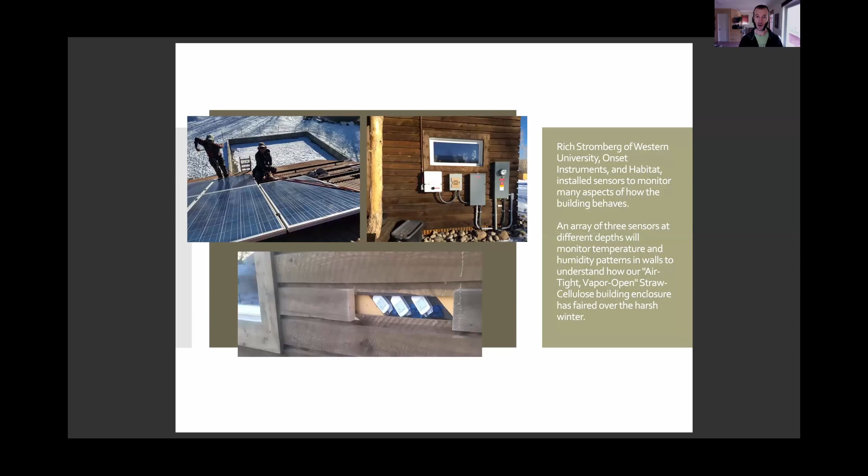And I should mention in the other picture here, you can see the solar, but in one of those boxes is actually an electrical monitoring system. So every circuit in the house has its own individual monitoring from a company called Emporia Energy. So we're not only able to know how much energy the house uses and how much solar is produced, but also how much each appliance uses. And we have water monitoring to monitor the amount of water, the amount of hot water, etc., as well as indoor air quality.

So yeah, this was the second building that we built for Habitat and with Habitat, building on the success of the first, as you can see on the left. And this was a 3-bedroom, 2-bath. As you can see, it got a different award from Green Build magazine. This was during COVID that we built this, so we had a lot of challenges to figure out on this one. The painted siding is actually cement siding that was donated. Typically, we would use local wood materials or a lower embodied energy material, not cementitious material. But because it was donated, it was free, and so we took advantage of that.

But a very similar envelope system, which we'll see the inside of soon. Both are single story, both have a vented attic in the top, with the heating and ventilation supplied by a combined system in the attic. That's the front of that house. All the houses have a south-facing main roof. And so again, we were able to at least cover the energy needed to run the all-electric home with a 4 or 5 kilowatt system. I'd argue you could make them bigger if you wanted to use more EV or you had some other energy needs. But we worked with Rich and with Nunatech and with students to design and install them in a way that was appropriate to the demand needs.

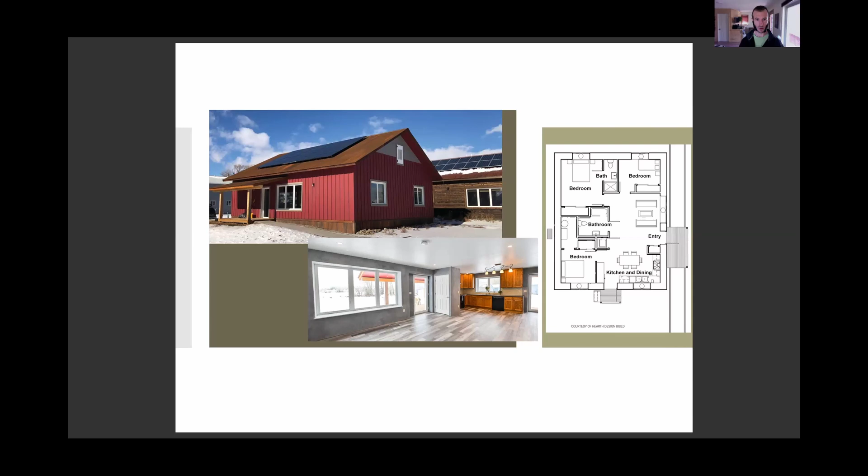Again, this is an interior shot of the 3-bedroom house, and you can see the plan on the side. The only real difference between this and the 2-bedroom is there is a bedroom in the top right and a bathroom for the master. Again, all that gray wall surface area in the interior is all plastered. We actually made our own plaster boards for this project versus the lath and clay plaster we used in the first project.

Just a note on heat pump dryers, we've had mixed success with them. It's a very airtight house, so it's nice having a condensing dryer that doesn't create negative pressure by exhausting to the exterior. But we've found that they're a bit of a challenge to maintain, and at our high altitude, some of the electronics have issues over time. Lessons learned. Again, this is another shot of that kitchen, in that gray plaster.

And we didn't only just try to make an efficient home, as I described. We also tried to be very cognizant of our embodied energy and our transport. We had one student in particular who did his thesis on the habitat houses and did a lot of carbon accounting. The thing about carbon accounting is, at the time, this was like 4 years ago, it wasn't quite as developed as it is now, and the tools still had some gaps that are being filled in at the moment. But this is part of why we got our low carbon footprint award from Habitat, because of our attention to doing these studies to make sure that we were actually accounting for materials we put in.

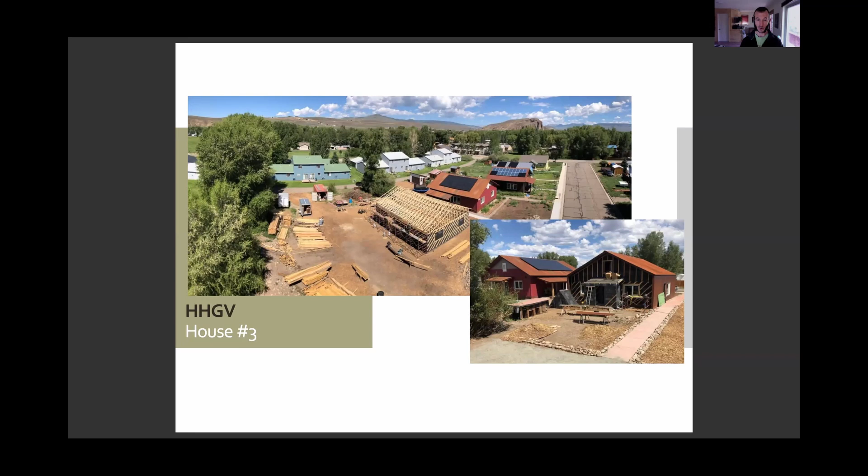You can also see that the solar is a little bit patchy, as Rich Stromberg has created an organization called Equitable Solar Solutions, and they not only donated the material, but a lot of their time, students' time. So we don't always get the matching or the prettiest solar panels, but they have a program where they recycle solar panels for community use, like this situation.

This was the 3rd home, just some of the aesthetic details, and also trying to work with durable materials. The rusted steel, for those of you who aren't familiar, in mountain towns is a very fashionable finish at the moment. But actually it's very practical. And while the steel itself isn't made in our local community, the rolling of it into corrugation is. And by just using raw steel and adding a vinegar solution, we're able to patina it and not have any toxic paints, because often paints associated with painting metal have a really high impact, both in terms of energy, but also from a toxicology perspective.

So going with that aesthetic choice, while steel does have a high embodied energy, as a long-term durable material that doesn't require maintenance, there's a reasonable trade-off there. So we use it for siding in this situation as well. This was the interior of that 3rd home. We focused a little bit more on wood finishes again. We did a lot more trim work on this house.

The floor, unfortunately, is not wood. It's a PVC vinyl plank, which was affordable, if not the ideal impact. Something we actually experimented with on this project was using OSB as a finish. So we sanded the OSB subfloor and did a really nice finish on it. And I really liked it, but it wasn't to other people's appeal.

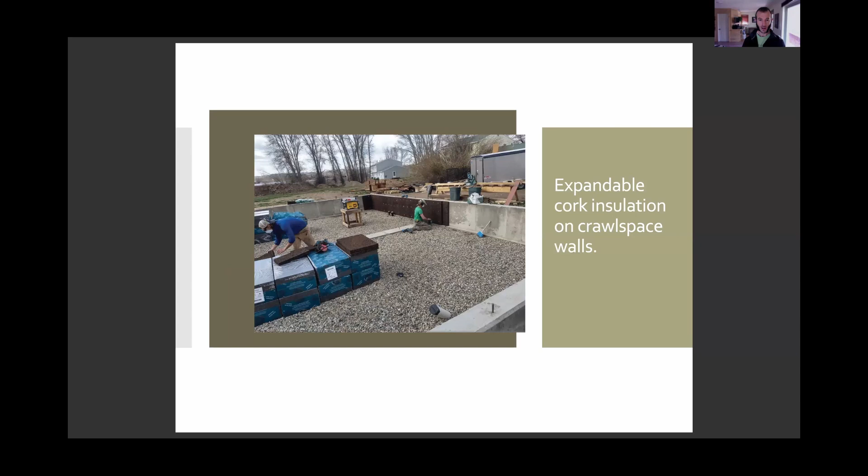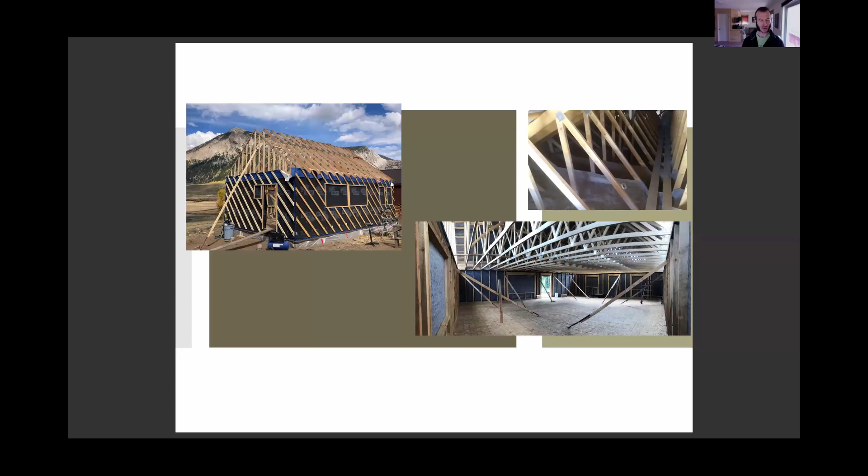This was a similar project that actually wasn't Habitat, but a local builder who volunteered with us took the techniques to build his own home. This is a shot of the outside of the house showing the sheathingless system. So essentially a stick frame is stood up like a standard wall, and then you wrap it in WRB, an air and moisture barrier, and then you apply diagonal bracing over the top of it, which gives the shear, but also creates this vented cavity for the sheathing to go over, or the siding to go over. Going at 45 degrees gives you the option of going vertical or horizontal with the siding.

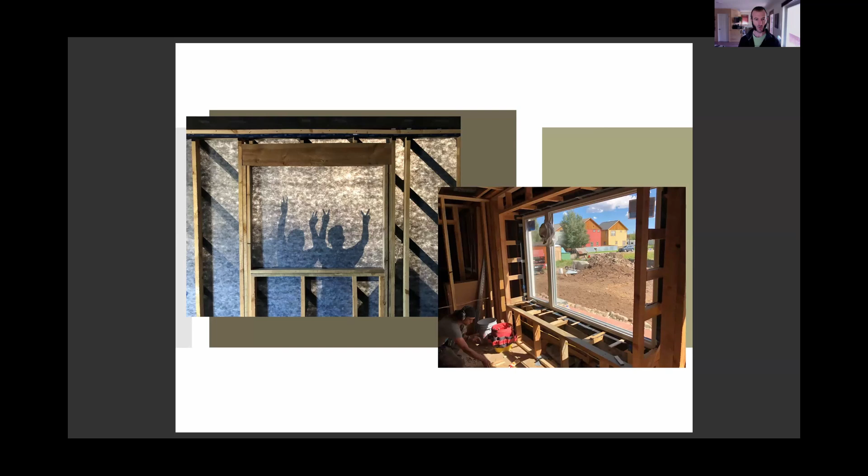The roof was a skip sheathing system, like an old traditional roof. This gives you a little shot of that double stud wall system. We either installed all cellulose or did a straw cellulose mix. Again, very vapor open, but airtight. All these houses, when we did blower door tests, and this was using students and volunteers, very few experienced high performance professionals, all these homes got a blower door test of 0.4 ACH50 or less.

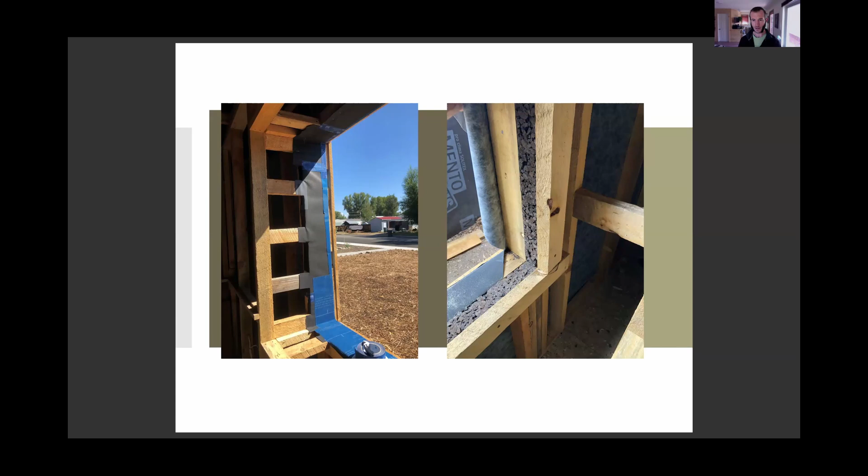Just some of the details of how we dressed the windows and the doors. You can see cork used there for some thermal breaks around the headers and jambs. This is a shot of the inside of the straw bale cellulose wall system. Because there were so many windows and doors and there was so much framing, we ended up actually just framing the exterior wall and not having free form plaster on straw bales, but going over it with lath plaster.

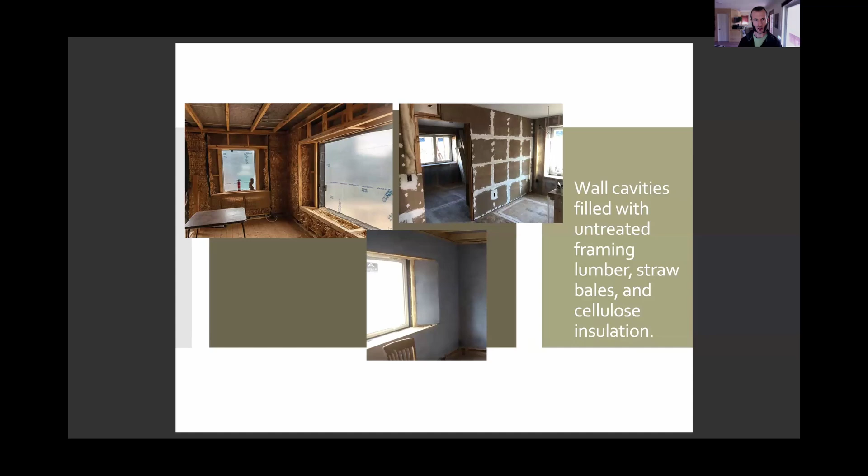And on the top right is an example of our clay wall system that we developed, which was basically making our own drywall panels, but using clay plaster and jute burlap. And so we made these 2x4 foot panels. On the flat, we would dry them out in drying racks, and then we would install them using drywall screws. You can see we've mudded and taped all the seams with the gypsum quick mix. Again, an exterior 20-inch thick wall.

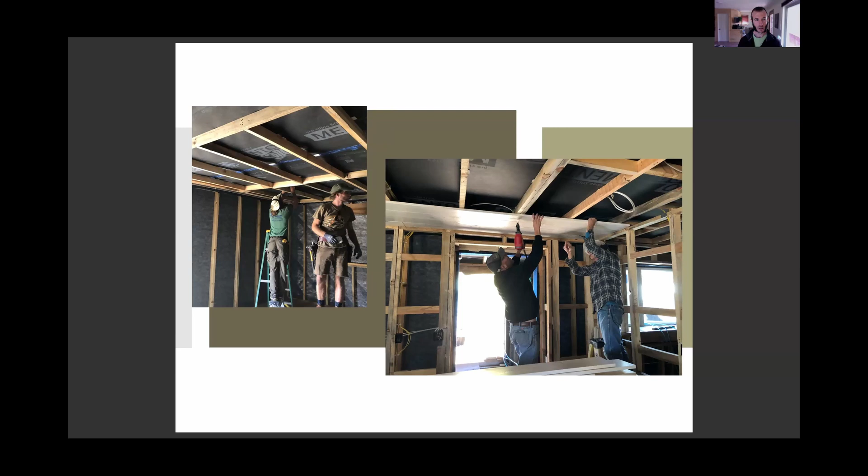We use a drop ceiling below our trusses to make sure that electricians make very few penetrations through our barrier. You can see then just the finished ceiling being installed. Because of the size of our ducting for our HVAC, we ran our ducting above in the attic. And there's an example of that. So we have mostly 8-inch trunk duct, trunk and branch, 6-inch branches. So we supplied the fresh air to the bedrooms and living areas, and extracted our exhaust through our balanced ventilation system from the kitchen and laundry room areas.

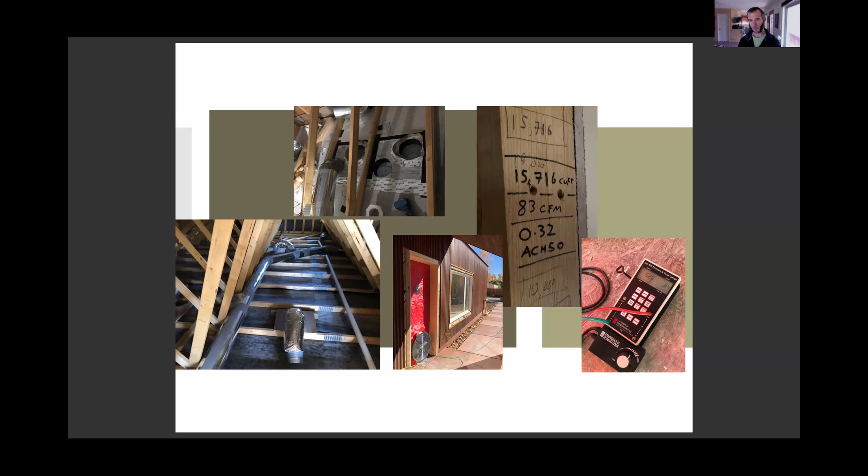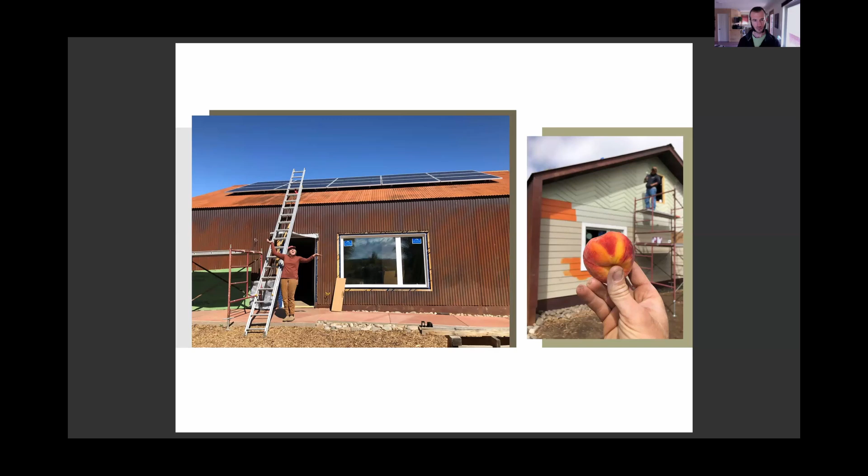And this was our first blower door test, 0.32 ACH50. I think that was one of the lower ones we got. Again, a very small building, but very low CFM. And this is one of the students. This was the peach color one of our clients chose, just proving it's actually peach. And this was the most recent. I actually wasn't involved with the design and the management of this build, but they adapted the design and the envelope system we'd used to build two houses at once, and went back to the wood-sided finishes. So this wasn't constructed by our company, but beautiful work done by the crew that took over.

I can stop for a minute too, because we can move on to the next project, or if people had some questions for a couple minutes about these Habitat projects, I'm happy to answer now. Yeah, the straw bale conversation came up a little bit, and obviously we have a lot of people building in what we would call cold, wet climates where it becomes more challenging. So I think they just wanted to hear from you on how you're ensuring that straw bales are not rotting, not having mold issues, and whether you have any suggestions for these other climates that are a little bit harsher towards it. Yes. So the first thing I'll say is there's a reason why I love Colorado.

For 250 days of sunshine a year and barely any rain, it's my favorite climate I've ever lived in.

So when it comes to moisture issues with housing or with construction, there's really two phases, right? There's the actual construction process, and then there's the use over time, the actual occupancy. So I would say, once you detail a house correctly and you understand building science principles, really straw as a material is appropriate for almost any climate and any application above grade. It's the construction process that the climate hampers the most.

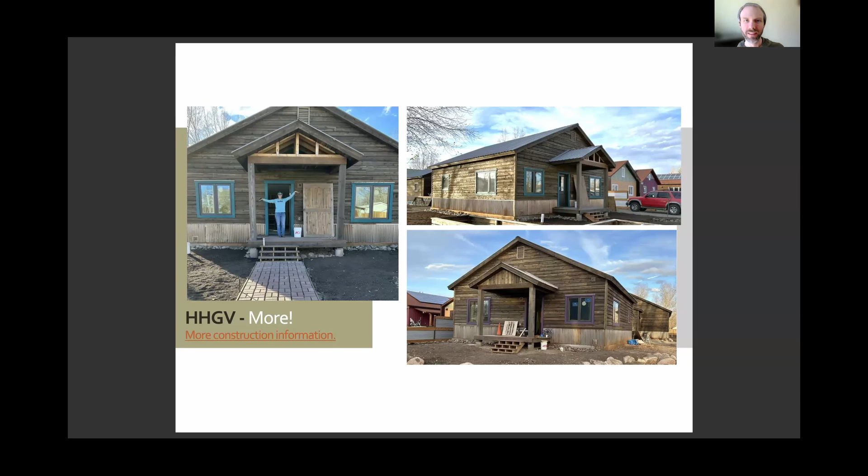So thanks. Yeah. Previous to living in Colorado, I lived on a Hopi reservation in northern Arizona and was part of a student build there, an amazing organization called Hopi Permaculture. They're more community focused, but they have a building program, so they do a lot of agricultural stuff. But occasionally they'll build houses for community members in need. And this was 2016. I was hired to come in and bring my skills to the local workforce.

They were all at least 18 years of age. Our students on this project were 18 to 30 or so, and we had about 20 students throughout the 8-month build. And this was definitely a project I'm most proud of and just had the best time on, partly because of the community that I was in and the need, but also their openness to new ideas and labor.

They were really hard workers and really into craft and art, not just their traditional, but also bringing permaculture techniques and natural building techniques into their community that hadn't historically been developed there. So it was a really beautiful hybrid.

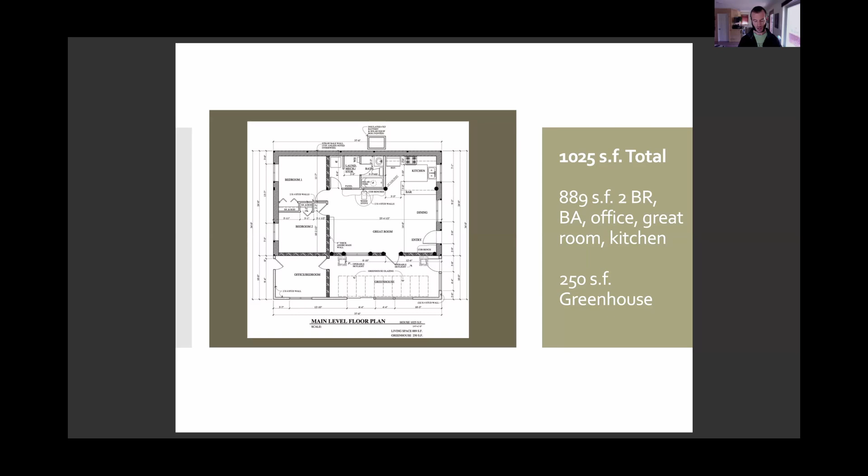The people who moved into this had only ever lived in trailers on the reservation, aluminum and old poor quality trailers, which, as you guys are probably familiar, are very cold in the winter and very hot in the summer, unfortunately. And so this was a huge game changer for them, particularly from an indoor air quality perspective. This was a very different building than most people were used to living in that community.

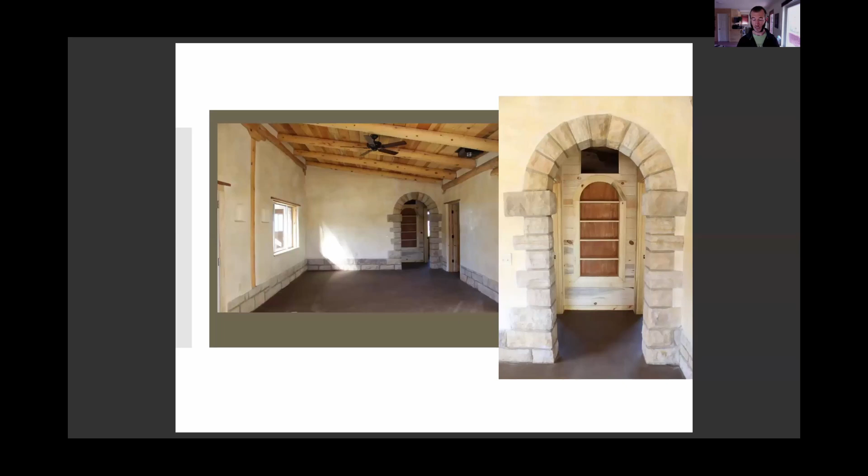We're looking at adobe walls in the interior, mass adobe walls. Again, the stonework was hand quarried from the cliff faces, from the mesas. The logs were all processed by the students, brought in from a local forest. And that's an adobe floor. They do beautiful plaster and finish work in this program. This was the finished kitchen. We built everything, including the cabinets, from scratch using local ponderosa pine.

Again, some of the little details, the niche details in the adobe walls. We did a tadelakt plaster surround on the bathtub. And this was the crew. It took about 8, maybe 9 months to build in the end, totally solar independent, off grid.

Hopi Permaculture has relationships with a solar organization, SEI, I'm trying to remember, something Solar International, and they came and built over a couple of days the solar system with the students. Yeah. Any questions on that? SEI, what is that? Solar something international. They work a lot on native lands, doing programs like that.

I can keep moving just for the sake of time. So this was a project that myself and a partner did in Vermont in 2015. This was basically utilizing the allowances for building in Granville, Vermont in particular. Excuse me, let's take a drink.

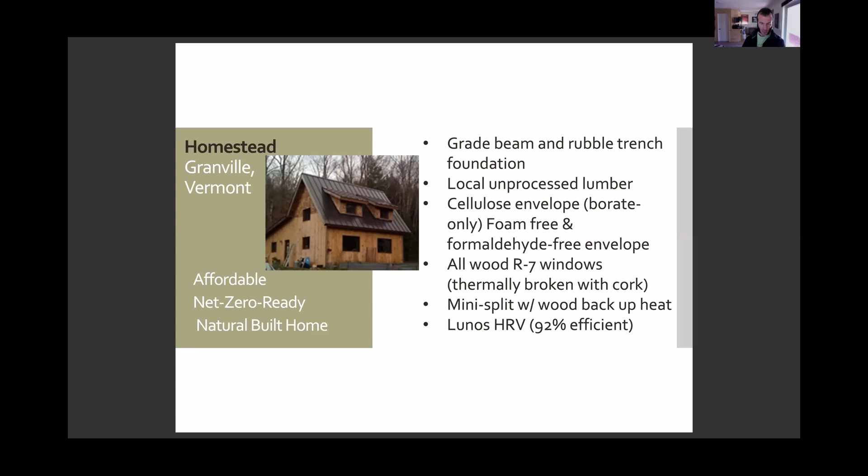So three total. The client wanted a foam and formaldehyde-free envelope, so we used local lumber that was milled within 20 miles of the site, and very little concrete, a grade beam over rubble trench foundation. This was the design process. This was 2014, so still maybe the early days before Revit had been fully adopted by the architectural industry. I've used SketchUp, I still do, partly because it's very flexible, though unfortunately not particularly automated.

For this whole house and most of the houses I've designed and built, I do something I call construction modeling, where you basically build everything within the house, including trim details, so that when you go to build it physically, as a builder and a designer, you have a very strong idea of how everything's going to go together and avoid conflicts with things like mechanicals and utilities.

When it comes to affordable housing, I always try to stress there's no affordable housing unless you integrate your design build processes. The more subcontractors, the more specialists you have, the more expensive a house is going to be, no matter what materials you use. What our experience has taught us is that a lot of affordable housing is really just cheap, poor quality, lowest bid housing. The only way to really get affordable housing is to have an integrated design build process, and when you do that, you get a way higher product.

So we are big on advocating for educational programs that emphasize that cross-disciplinary experience, whether it's different trades or simply having design professionals who understand how to build, which is often not the case. This is a really powerful tool for doing that, and you can see examples of that.

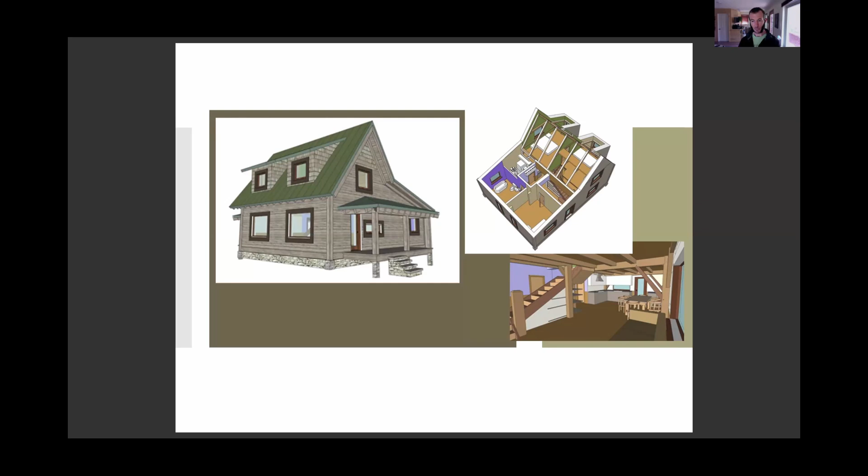And that's it. Yeah, I would love to have discussion and open for any questions. I know there's a lot of information in there, and I will say I have a lot more other videos, presentations, and a lot more information that I hope Brett can share with anyone that's interested about getting really into the weeds of these projects.

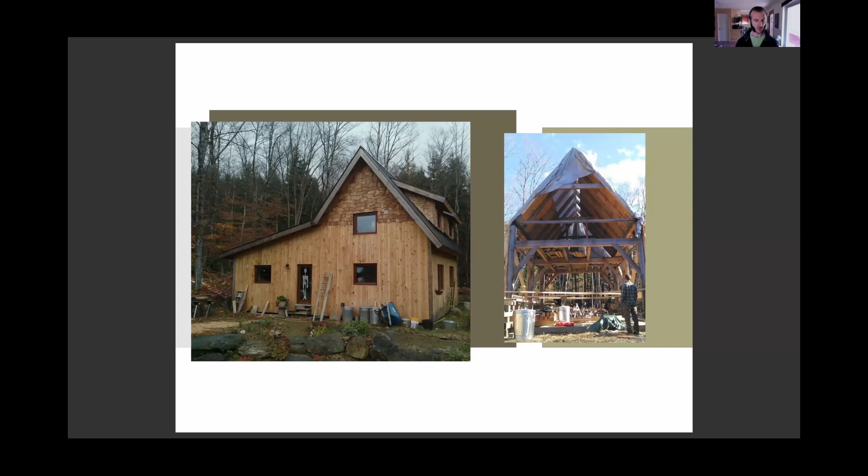But these houses in particular are not simple systems. They're very complicated. But if you do design build, you can make them pretty seamless to build and get a really strong understanding of all that as you're doing it.

Great. Well, thank you so much, Cillian. We're going to stick around for some more formal Q&A and questions. But Debbie, I know you were going to take us briefly through some other projects, and I just realized I never loaded those up. So I don't have them ready to go. I just didn't know if you had like an overarching idea as I put this together.

Okay. Well, yeah, that's a hard act to follow with those projects. And I would say the other projects that we're going to be talking about would all strive to use those sustainable, low impact, low carbon materials. But for whatever reason, lack of professionals that are knowledgeable in the area, sometimes lack of a willing client, you can't always do as much as you would like. And I think all professionals involved with these kind of projects are always pushing for more.

But these other projects that we wanted to show are projects throughout the U.S. where people are trying to do a lot more. And I'm really impressed with Habitat in general. When I see a project where Habitat is striving on this low budget, if they can do it, then all arguments for other people with more money, to me, just go out the window.

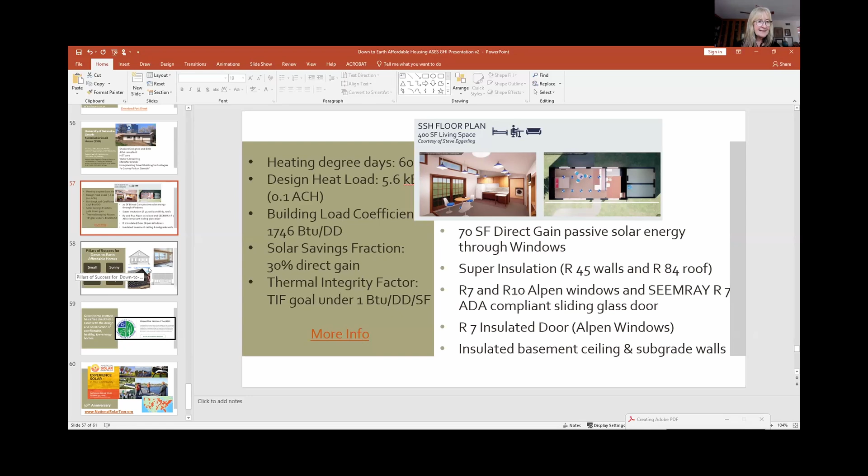And Brett, I was going to ask you at this point, do you want to talk about the Green Star Homes checklist that people can use from the GHI website to help them with their projects?